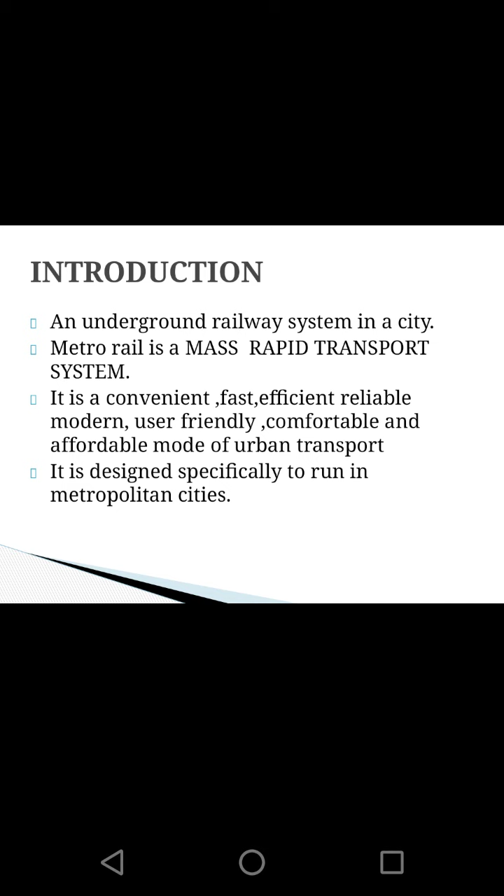Metro rail is a mass rapid transport system. It is one of the convenient, fast, efficient, reliable, modern, user friendly, and also comfortable and affordable modes of transportation. It is specially designed to run in metropolitan cities.

The history of metro railway: the first metro rail system started in London in the year 1863, which was the underground metro rail. In India, we started with the first metro railway system in Kolkata, which was Asia's fifth metro railway, in the year 1984. Now we have metro railways in cities like Bangalore, Lucknow, Kolkata, Delhi and Mumbai.

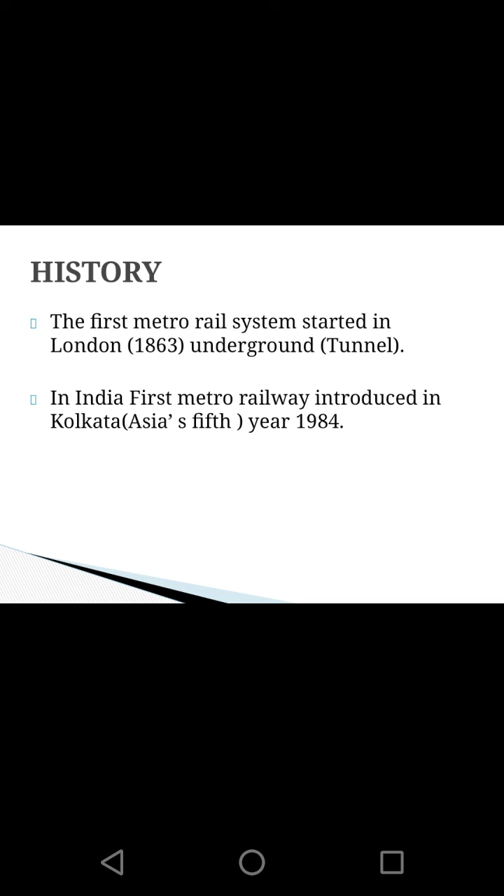What is the necessity of a metro railway system? This is one of the best options to avoid the problems related to traffic. As we are observing, there is a day by day increase in population and everyone is using their personal vehicles. So we may suffer from traffic problems. So in order to reduce it, we can have the metro railway option for transportation. Also, to avoid the growing traffic congestion, we can use the metro railways.

This also reduces the air pollution as it runs on electrical energy only. It will also help to avoid congestion at peak hours. We can save time by using this mode of transportation. Also, we can reduce fuel consumption. So that is why the metro railways are a necessity.

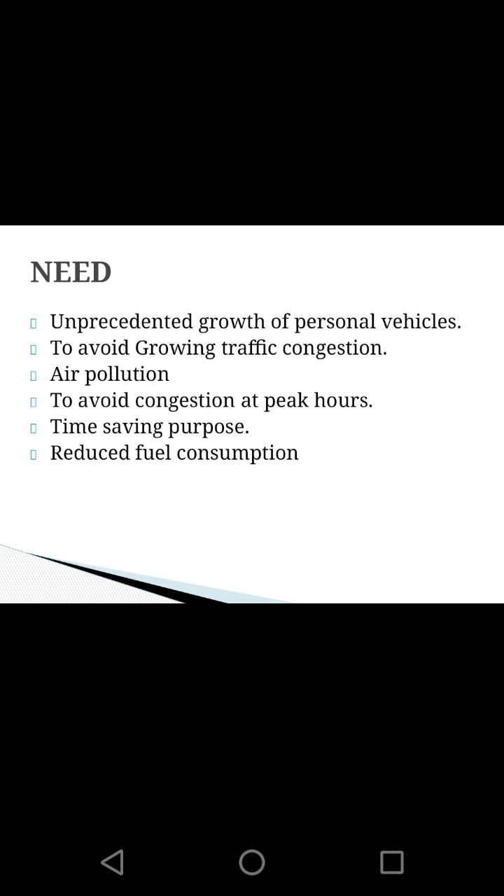The features of the metro railway system. Metro railways are provided with air conditioning and ventilation systems for the environment control of stations and tunnels. We may observe there are automatic door opening and closing systems. Also, automatic ticket vending and checking systems are available in metro railways. A public addressing system is provided on the trains to announce the approaching stations.

There is an LCD display in the metro railways on which the station number and the name of the area is continuously displayed. Also, the metro railways are provided with CCTVs for security purposes. This is one of the life safety and security options. Platform screen doors are observed in underground stations.

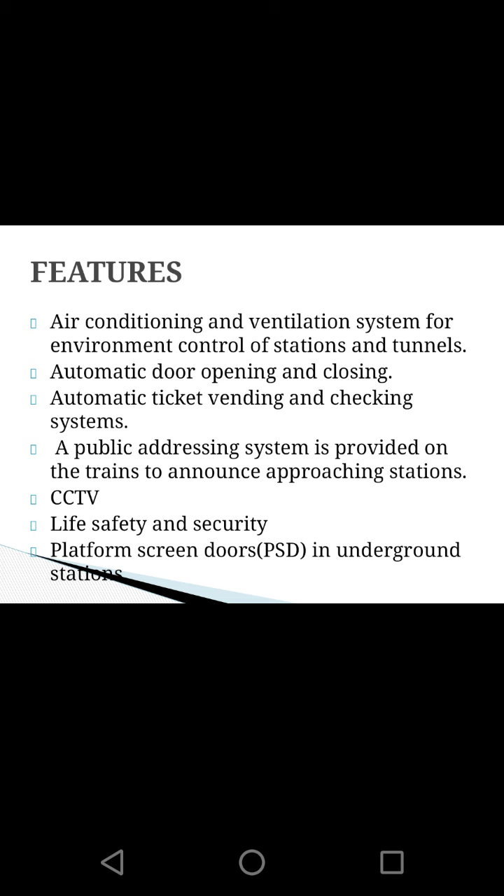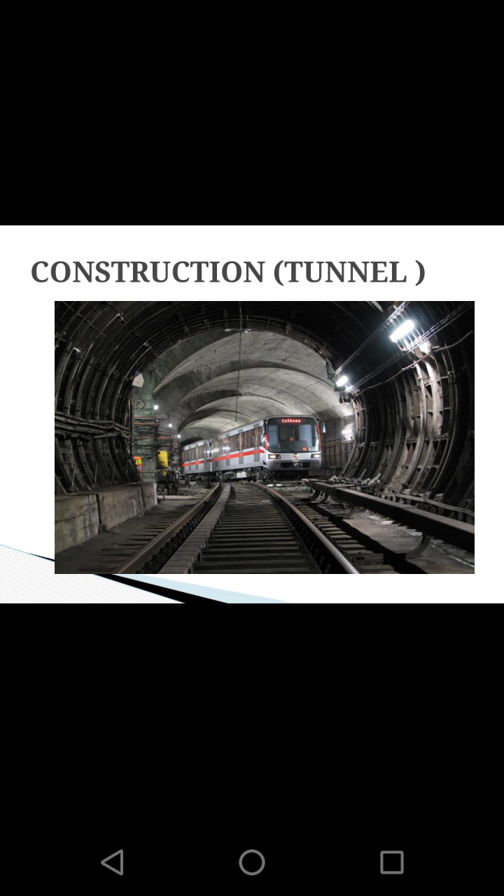You can observe here the construction-wise metro railways. So there may be underground metro railways or elevated metro railways. In this picture you can observe the tunnel metro railways whose construction is underground. The next type is the elevated type. As you can see in this picture, the structure is elevated, that is, it is above the road. So you can use the road for transportation purposes. So there is no interference with the footprints.

Like we have seen in monorails, the construction is the same for the elevated type, that is, RCC beams or a pylon structure is provided for the movement of metro railways.

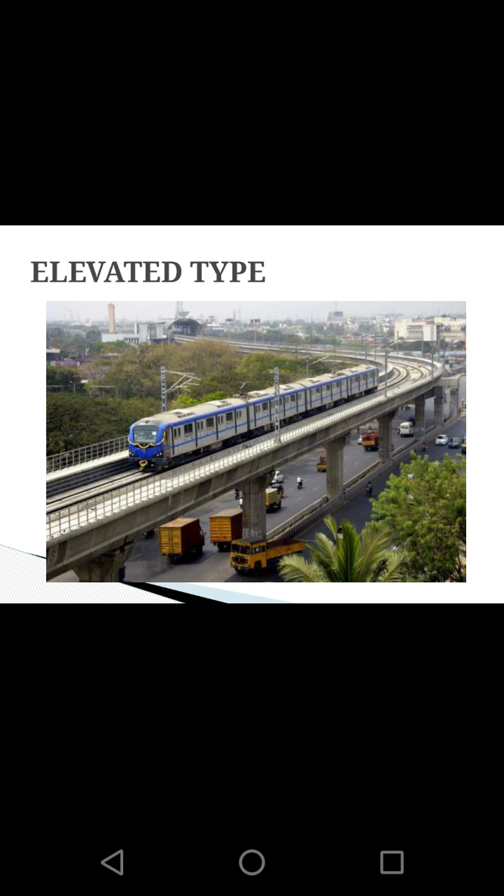Now let us see how the metro railway works. Like normal trains, in some areas metro railways receive electrical energy from overhead equipment, that is 25 kilovolts, for their operation. In some cases, they may use 750 or 1500 volts DC for running the train. A tunnel or underground railway system uses DC supply. For current collection, the third rail system is used.

The metro railways are provided with an exclusive right of way path. That means only on that path the metro railways can run. There is no interference by pedestrians and other vehicles. Also, you may observe there is grade separation. The motors used for the metro railways are DC shunt motors.

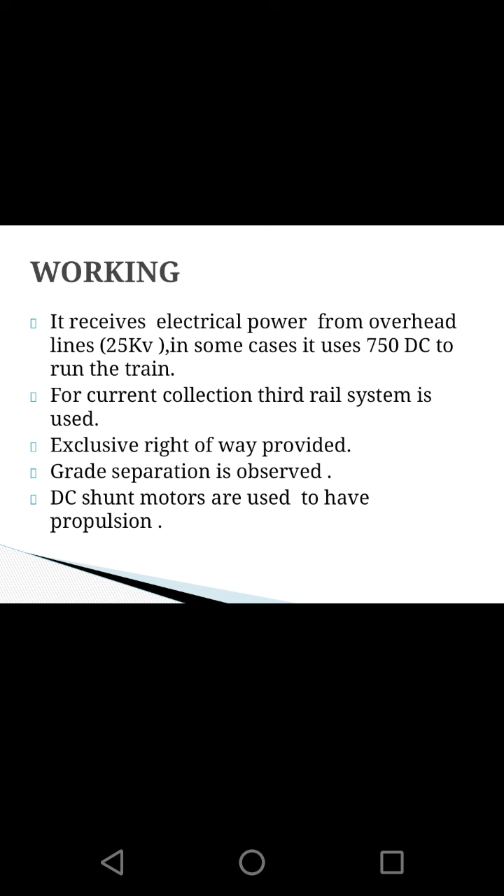One of the interesting things is that a metro railway can work without a driver. Now you will be surprised how it can be. This is happening because of the control from the central room. Upon departure, control orders are given to interlocking systems to open a route. This system then checks the possibility of opening the route and the positions of the switches or points before sending a movement order to the train's onboard systems, which control the acceleration and braking.

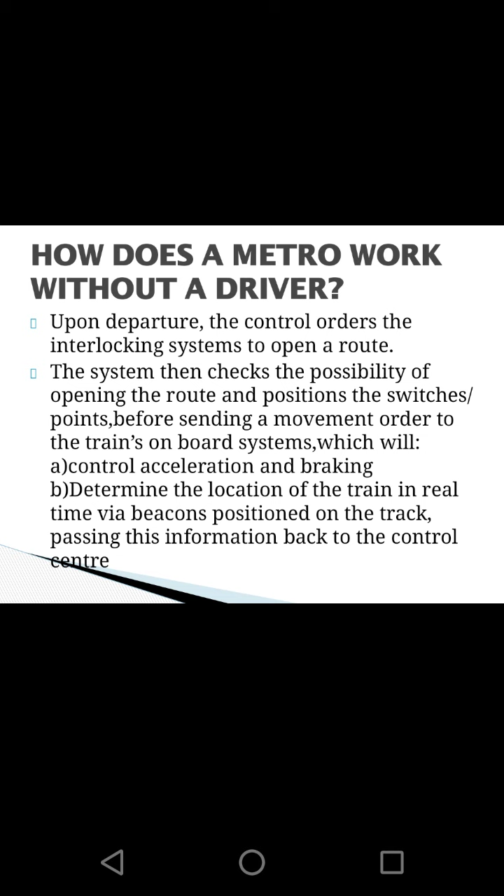Also, it determines the location of the train in real time via beacons positioned on the track, passing this information back to the control center. So signaling is very important for running metro railways. It checks that the train speed is compatible with the restrictions imposed on the line, and the position of the train correctly with the beacons, that is signals, in front of the platform doors upon arrival in the station before ordering the opening of the doors.

Let us see the advantages of metro railway systems. As we have discussed, this is one of the most suitable and best options of transportation for densely populated cities. Also, it is environment friendly. The metro railways run on electricity, so they are eco-friendly as well. The energy consumption is 4 times lower than normal trains. And in a very short time, passengers can reach their destinations.

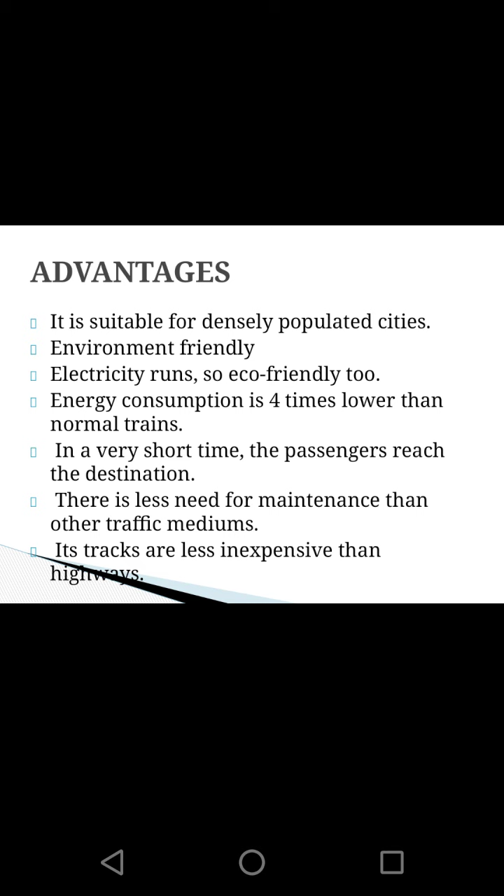Also, there is less need for maintenance than other traffic mediums. The tracks are less expensive than highways. Also, metro railways cause very little noise. They also reduce traffic related problems. They are very reliable and comfortable, and there is a very low per head cost compared with other transportation mediums.

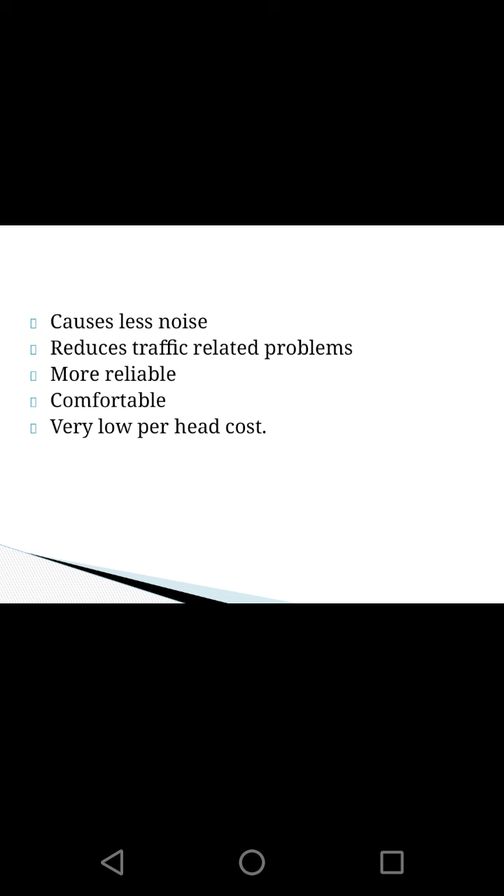There are disadvantages also. The first disadvantage is the cost factor. The amount to be invested for the construction of a metro railway is very high. At the time of construction, there is slight congestion on the roads. It requires electrical energy for its operation. There is no recovery of the heavy capital cost. Whatever ticket income there is from metro railways is used for the operating cost.

It also needs foresight for station location. It needs super large ridership.

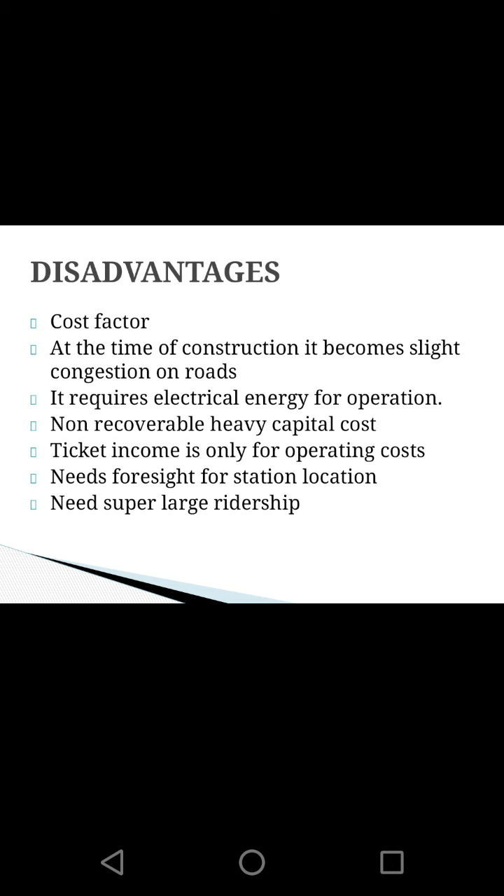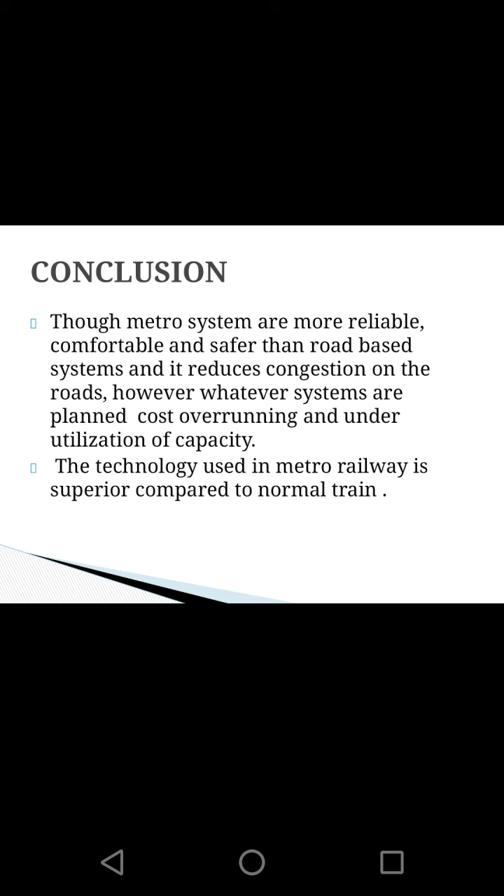The conclusion of the topic is, though metro railway systems are more reliable, comfortable and safer than road based systems, and they reduce congestion on the roads, whatever systems are planned have cost overruns and underutilization of capacity. So, if the project is properly installed, then it may be the best option. The technology used in metro railways is superior compared to normal trains.